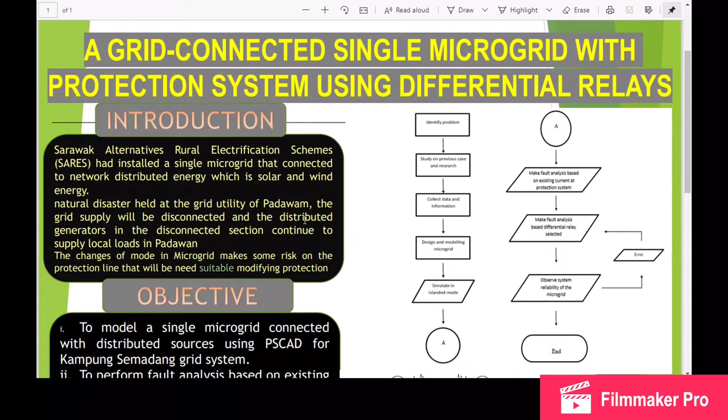The objective of my project is to model a single microgrid connected with distributed sources using PSCAD for the Kampung Semadang grid system. Secondly, we want to perform fault analysis based on the existing current at the protection system and choose the suitable specification of differential relay.

Thirdly, to observe the system reliability of a single microgrid with differential relay. To achieve this objective, we must first model a single microgrid connected between the main utility and the distributed energy, involving solar and wind energy, suitable for the load at Kampung Semadang.

Using the PSCAD simulator, secondly we must do the analysis on the operation of the protection system when there is an internal and external fault around the system, based on the existing current during the exchange of mode in the microgrid.

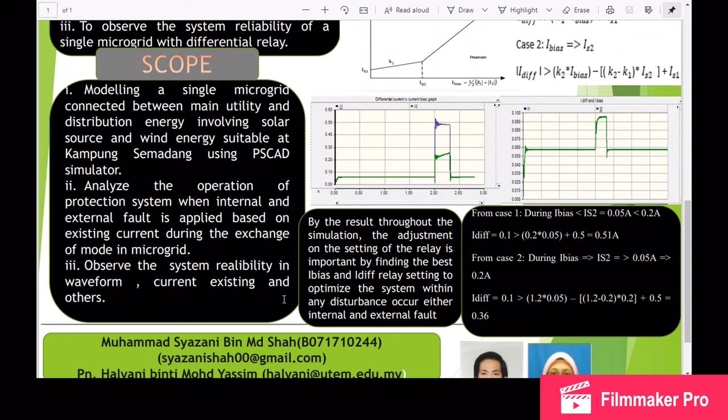Thirdly, to observe the system reliability in waveform, current, existing conditions, and others.

For the methodology of my project: firstly we already identified the problem, and secondly we will study previous cases and research. The scope is the rural area of Sarawak, and we'll be collecting the data and information.

For this semester, we already designed and modeled the microgrid and simulated it in islanded mode.

When we have already simulated in islanded mode, we will make a fault happen at the line based on the existing current at the protection system. When we make the fault analysis based on the selected differential relay, we will observe the system reliability of the microgrid.

When there is a disturbance on the line, we will observe the protection system, the breaker, to see if there will be an error or not.

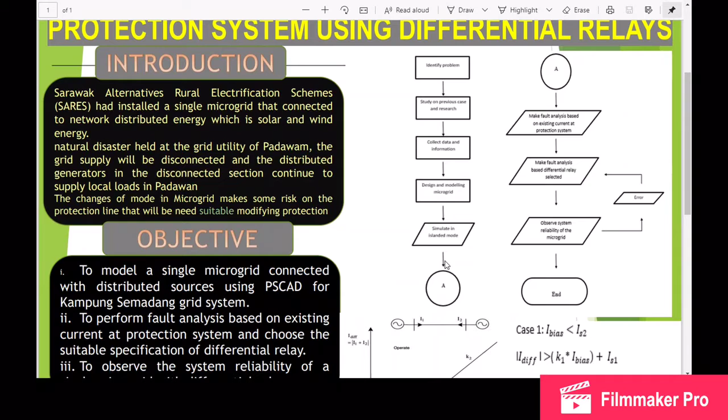Based on my dual differential relay, I will show you the dual differential relay in my simulation.

This is the setting that has been done, as you can see. This is the formula and algorithm that needs to be applied to successfully follow the characteristic of the dual slope characteristic of the differential relay.

As you can see, we got IS1, we got K1 and K2, and this one is IS2. Based on the graph and the result in my simulation, there will be internal and external cases.

On the left graph is the internal case, the internal fault that happened, and this is the result of the I differential and I bias. On the right side is the external fault result shown on the graph.

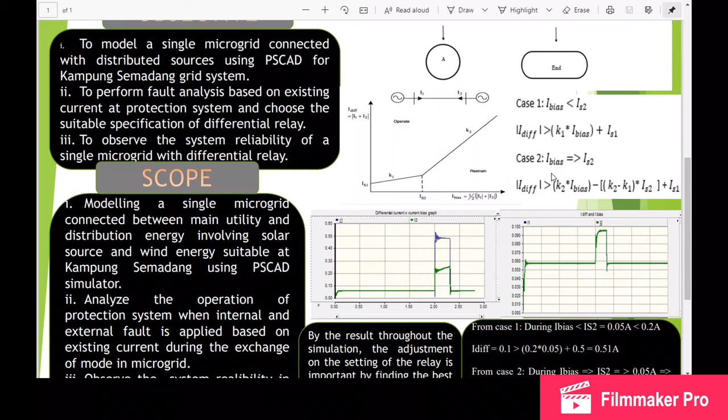In case 2, when there is a disturbance happening, the formula will go through this process, and the system will transmit it into the graph. So case 2 is the restraint region - in this area the breaker will give no pulse, so there will be no tripping. So by the result throughout the simulation, the adjustment on the setting of the relay is important by finding the best I bias and I differential relay setting to optimize the system within any disturbance, either internal or external fault.

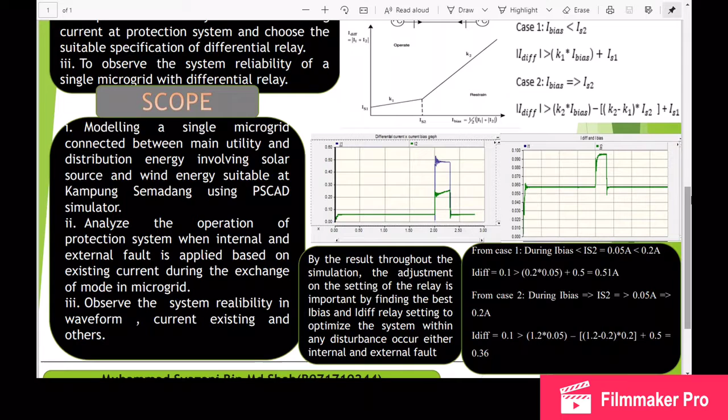I have already made a calculation to prove that the graph and the dual differential relay setting is already correct to maintain the system to work correctly. From case 1, I got the scenario when I bias is less than IS2.

I already replaced the numbers with the data that I collected. IS2 I've set for 0.2, and the I bias is 0.05 ampere. So definitely when I bias is less than IS2, it's a case when there is breaker tripping.

In this case, when I differential is got to 0.51 ampere, when the formula has been calculated and transmitted to the graph, in this case the breaker will give a pulse to be tripped.

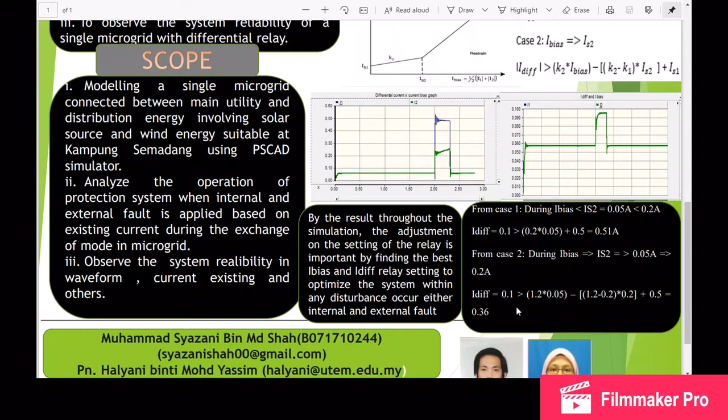So basically we have proven from the simulation and the calculation that the value we have set on the dual differential relay has been proved correct, that the system has flexibility to be used. In our next video, we'll go through the simulation that happened and show you the results. Hope you can enjoy it.

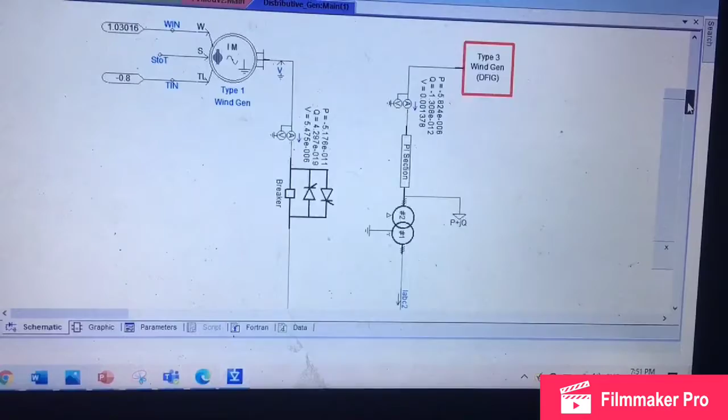Before we start our simulation on the microgrid using differential protection, I will present the tools that we use to make this modeling. So firstly,

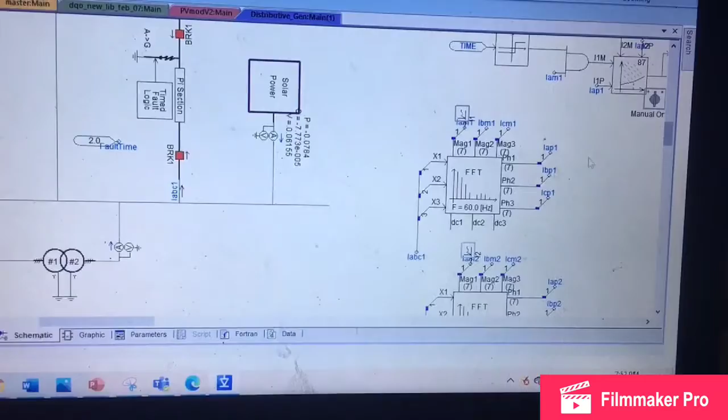the microgrid consists of 3 distributed generators: a wind generator, the DFIG, another wind generator on the other side of the line, and this solar power. All 3 distributed generators are connected to the 0.6 kV bus, and this is the HV network, the main utility.

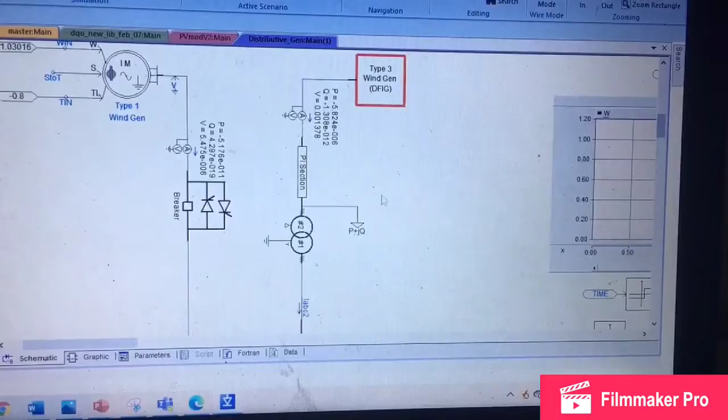So before we run, this is the line of the microgrid that will be in the grid and the islanded mode. This is the part that will change to the islanded mode. This is our load. When a disturbance happens around this line, the changes will be around this area. For now the load is connected to the main utility.

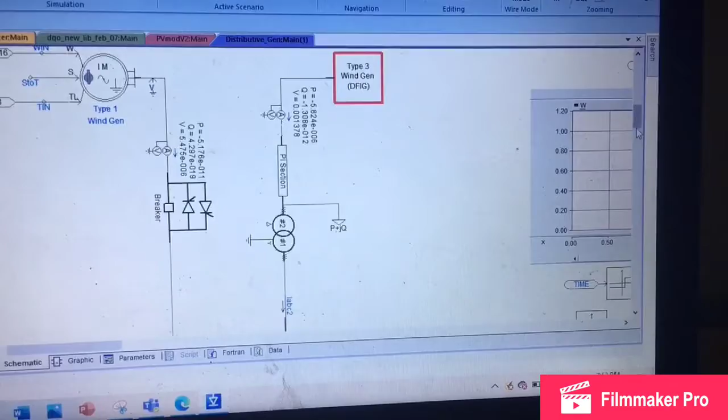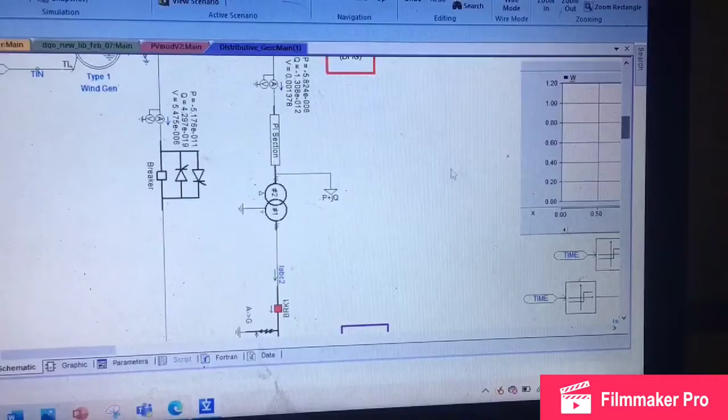So when there is a disturbance around this area, there will be a cut off on this part, because we have the circuit breaker in these 2 parts. This is the disturbance that will happen here, which is the internal fault. When a fault happens in this area, the circuit breaker will cut off, there will be a drop in the power supplied to this load, and this area will be in the islanded mode.

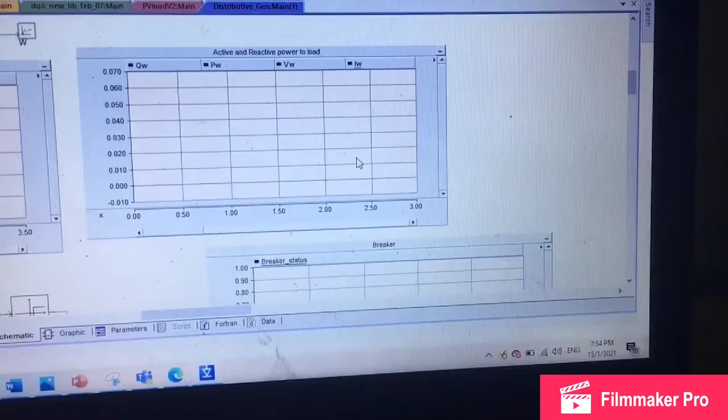This part is the graphs that will show the result. This is the I differential and the I bias, shown in green and blue. This one is the breaker status that shows whether the breaker is on or off. This one is the active and reactive power that goes to the load, and this one is the power produced by the wind generator.

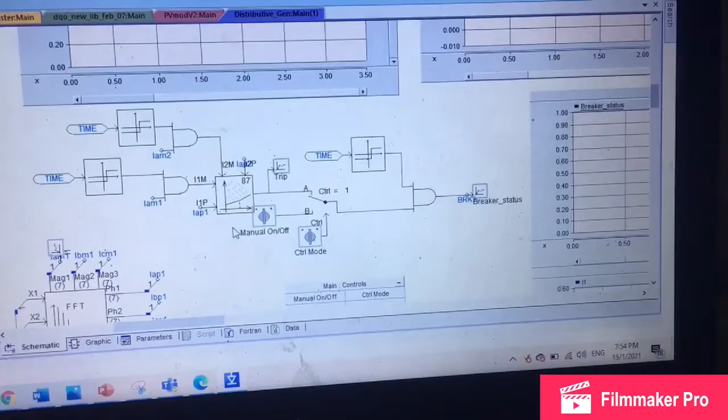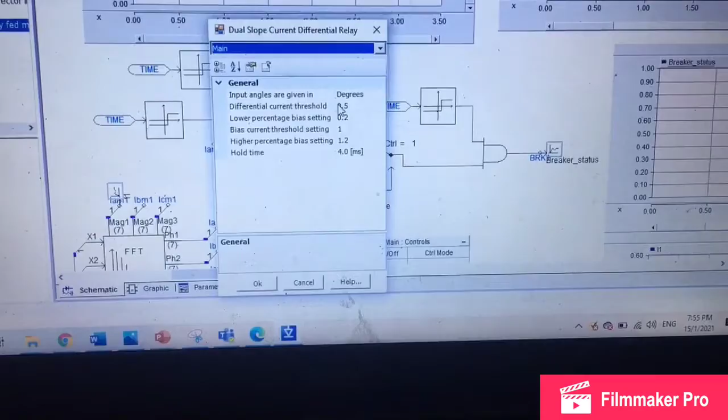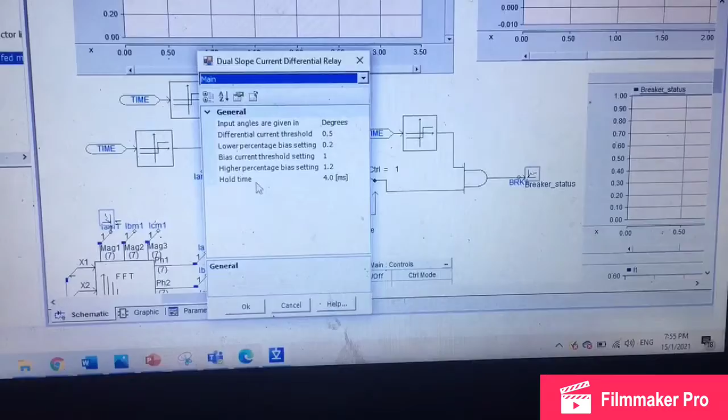This one is the lower percentage bias setting, which is 0.2, the K1 slope. This one is the bias current threshold setting, which is 1. This one is the higher percentage bias setting, the second slope, K2. The relay hold time is 4 milliseconds, and the graph will show the holding time of the relay.

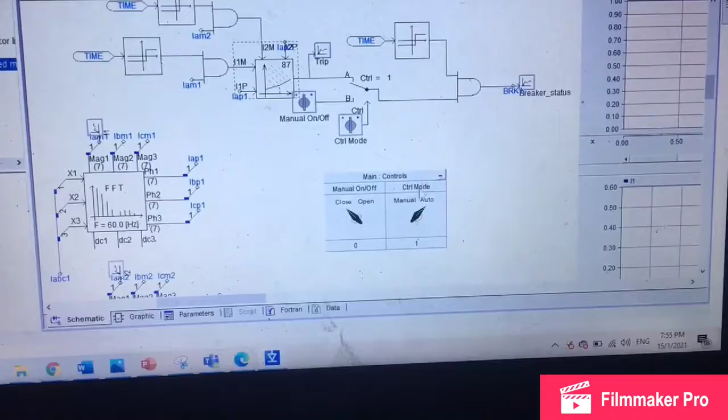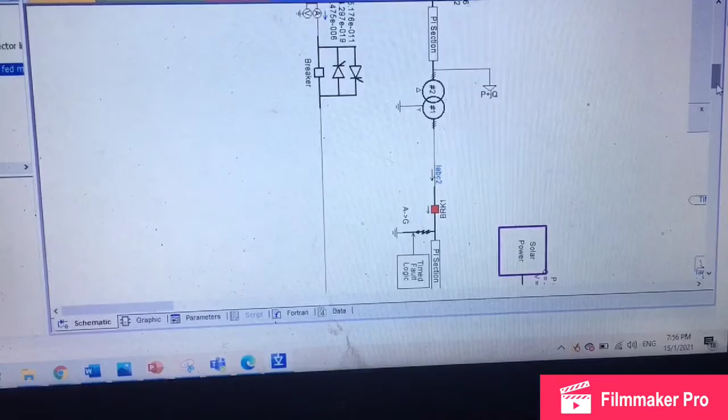Okay. The breaker can be changed to manual and auto mode. As there is a disturbance, it can change to auto. For now we'll be operating on auto. With that, we will start to run the simulation. For this case, it's about the internal fault of the microgrid. So we'll be running.

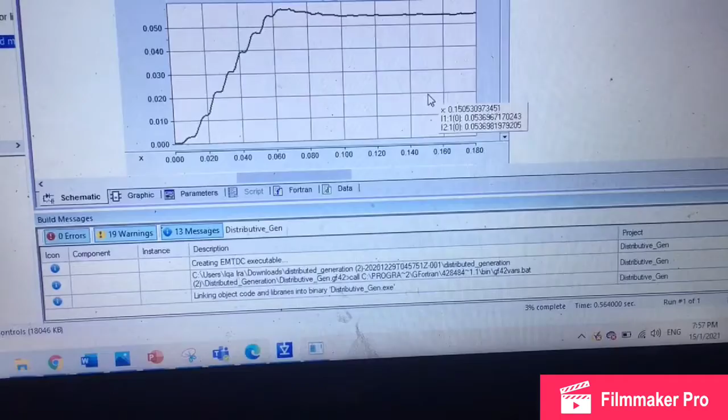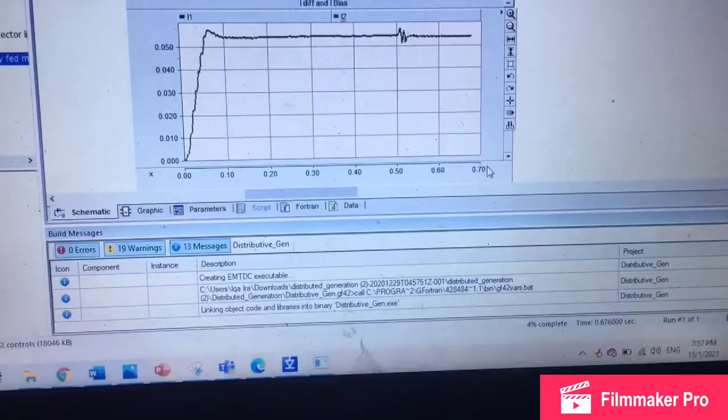So for now, the I bias is currently on the operate current, so there is no current dissipated in this area, relying on the formula stated on the poster. The disturbance will be triggered at time 2, as set up on this fault time.

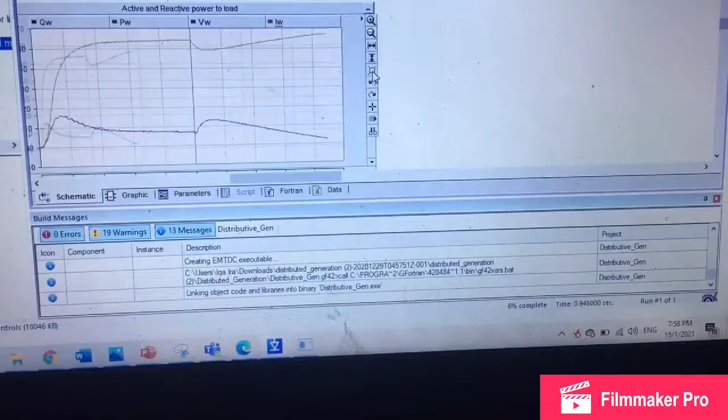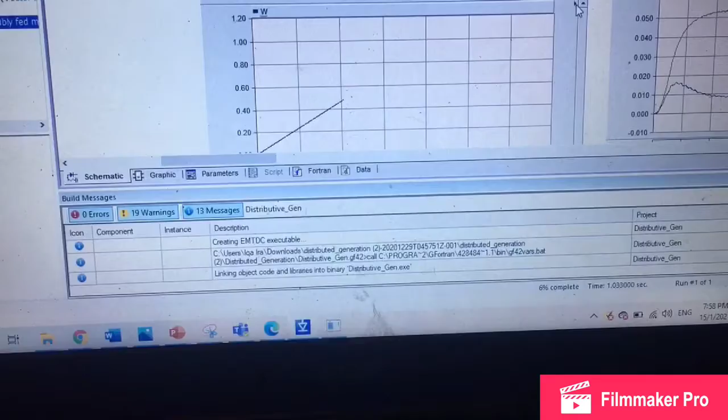So as you can see in the breaker status, there will be no trigger of pulse given that sense from this protection system relay. So the load is currently receiving power from the generator. So this is the power load from the generator, it is smoothly running with no disturbance.

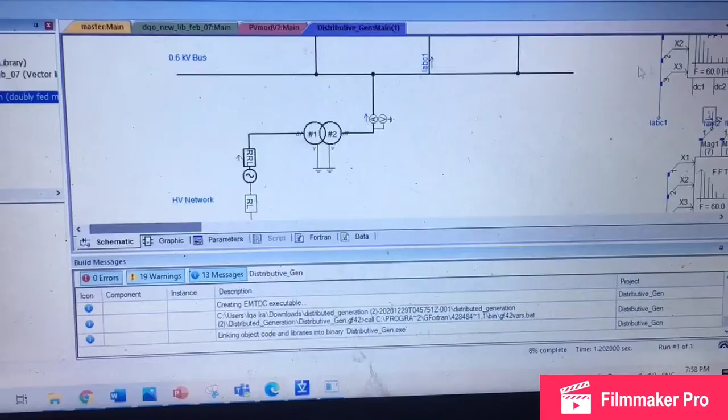So currently we'll be waiting for the current to arrive at the disturbance time or fault time. So basically the current is operating in normal operation, which is the current that comes in is constantly throughout the protection relay the same as the current which goes out. So there is no change of current that goes through the line. So another few seconds and it will go to the internal case of fault.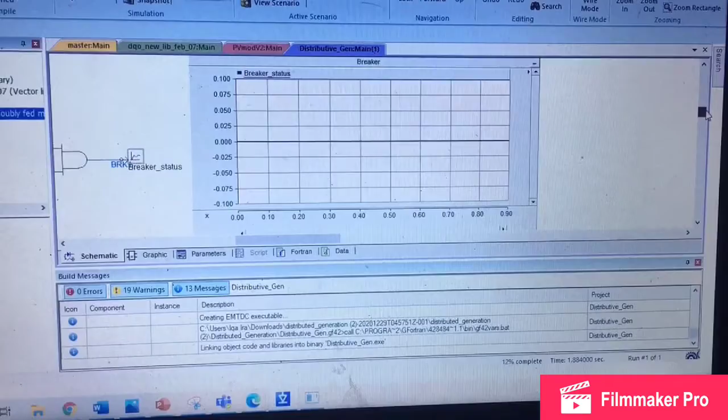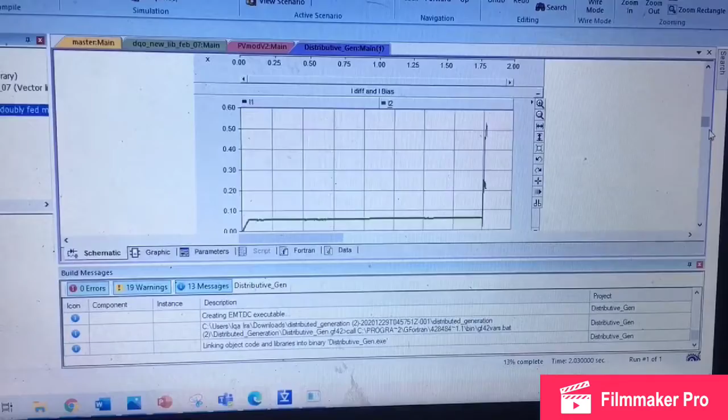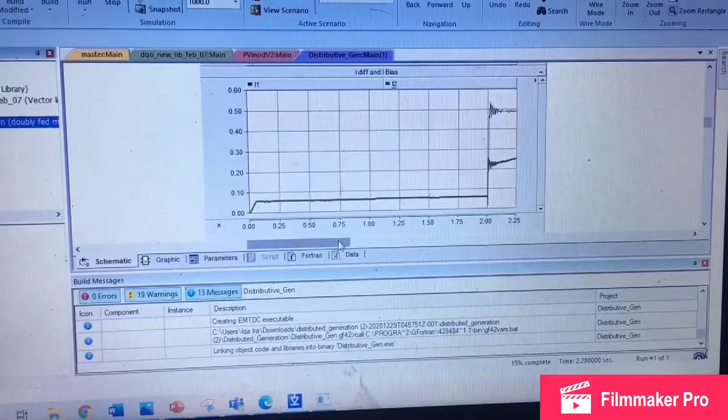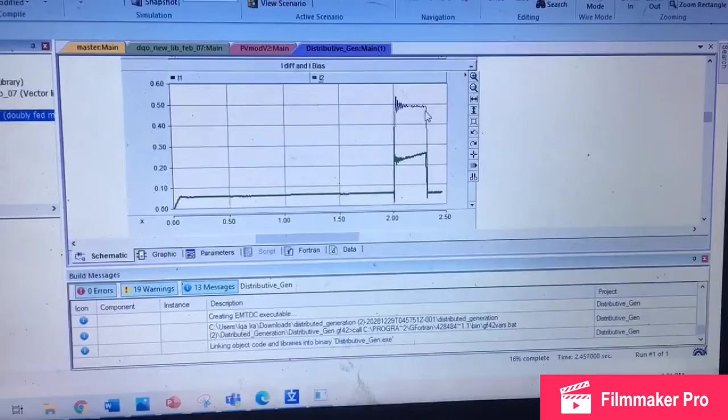So you can see when it reaches this setting of the fault time, the current is changed when there is a disturbance around the internal fault. So as you can see, the I differential current is changed and increased. So from the differential dual slope, the current has been overcome from keep increasing. So based on the formula set up for the dual slope differential relay, based on the algorithm of the formula that you can see on the poster, the current has already been overcome.

So when there is any disturbance happening in the internal area of the microgrid, if there are changes of current that comes in and out of the protection relay, the system will be flexible if there is any disturbance happening around the microgrid.

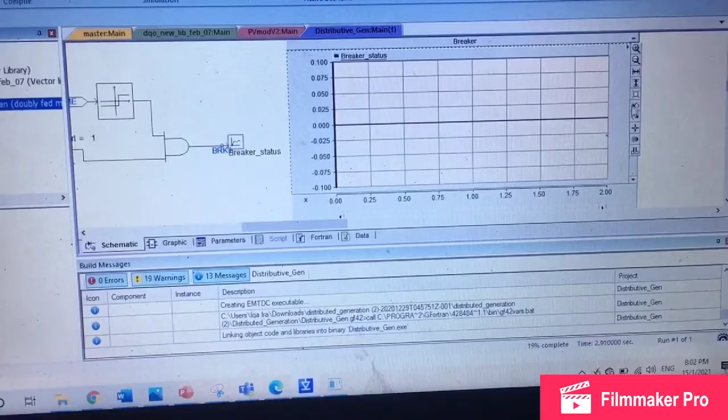So when the breaker is open, there will be a change of mode. As there is a change of mode from the grid to the islanding mode, there will be a drop of power happening to the load. So that is the explanation for the internal cases.

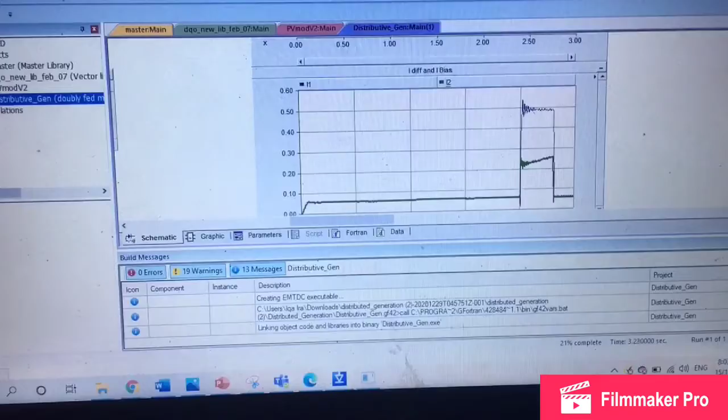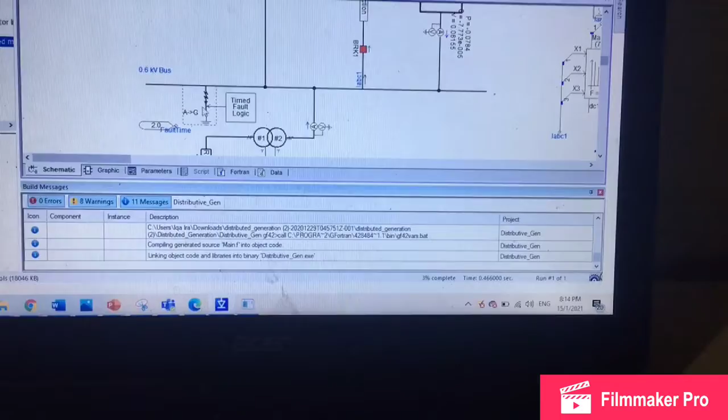So the current situation is about the external fault. So for showing the external fault graph, what happens when there is an external fault outside the microgrid line. So I've changed the fault to be made outside of the internal part. I just put it at the 0.6 kV bus in this area, so the disturbance will happen in this area. So what will happen to the current on the I differential and I bias? It will be the same on the I operate current.

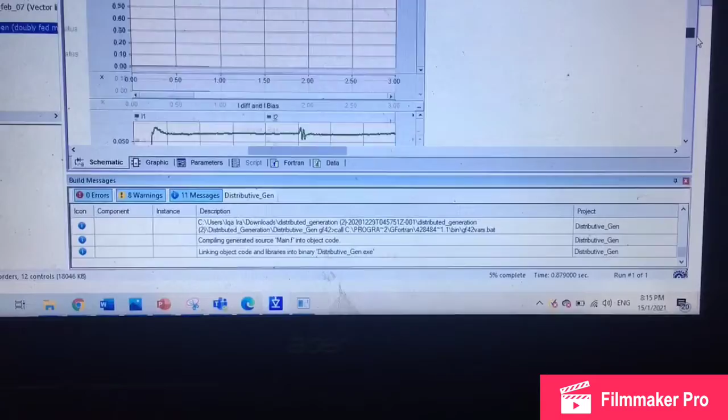So when there is a disturbance happening externally, what will happen at the breaker if there is a sense of fault? As there is a sense of pulse to be sent to the breaker, if there is a disturbance happening at the fault time of 2, so we'll be waiting for the disturbance to happen at the fault time.

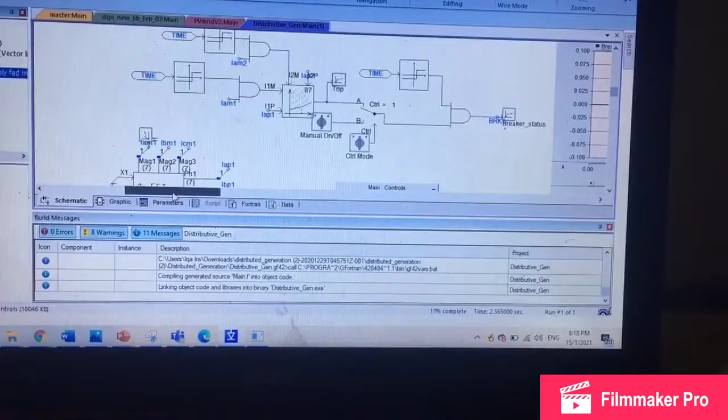So on this graph there will be no pulse given to the breaker, so there will be no opening and cut off of the breaker. So everything will depend on the graph. So that's all.